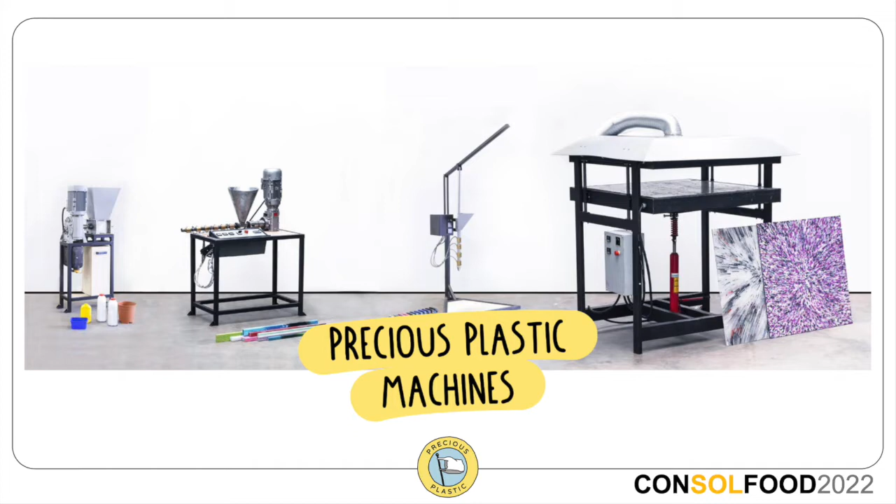For the past few years, we've been involved in projects developing solutions to tackle the plastic waste problem. At Precious Plastic, we help develop machines and online tools, open source, to make plastic recycling more accessible for everyone in the world. At Flipflopi, we've built the first sailing dhow from plastic waste collected along the beaches of Kenya, and are taking this boat on expeditions to spread awareness, connect, and inspire more people to change their perspectives and act towards a plastic-free environment.

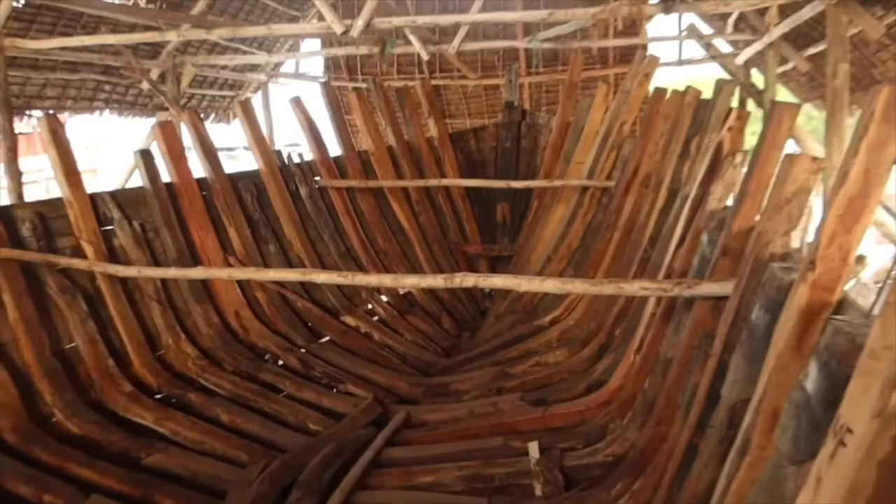We've already inspired a lot of change on an individual and political level. But now we are working on a big boat to bring it to the next level and take this positive symbol and change around the world. But with this big recycled plastic boat come new challenges we have to overcome.

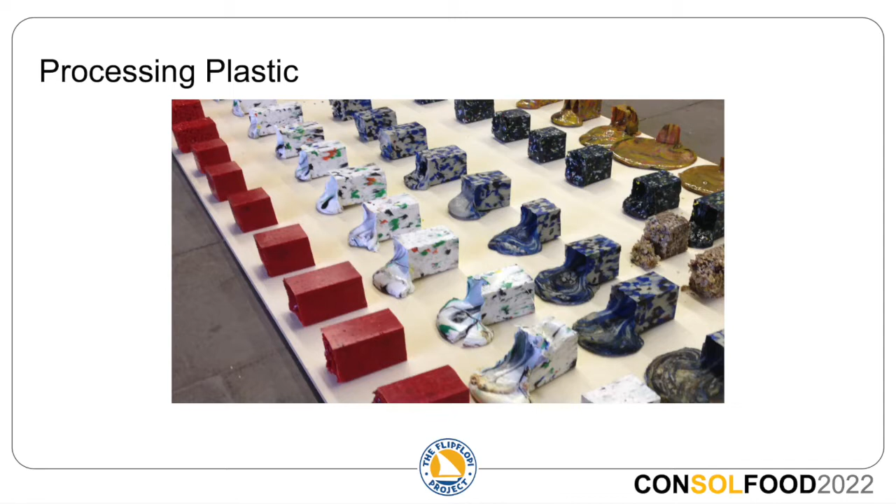So a quick note for general understanding: the principle of plastic recycling works like this. You can heat plastic up until it melts, and when it's soft, you can turn it into different shapes, basically any shape you want. And when it cools down again, it hardens. So basically just like chocolate.

In the case of this big recycled plastic boat, we are going to make big parts from recycled plastic. So we will need a lot of heat over a big surface and volume and over a bigger amount of time, because it takes longer to manufacture those parts. And that requires a lot of energy. As in Kenya, electricity is not as easy to get and maintain, while you do have a lot of sunlight, that brings us to our solar cooker.

And actually, we're not the first ones who had the idea of using solar cookers for plastic recycling. In our Precious Plastic recycling community, we've already seen some people building and using smaller solar units for smaller injection volumes and for plastic extrusion processes. So seeing that working in our community encouraged us to apply solar on our project too.

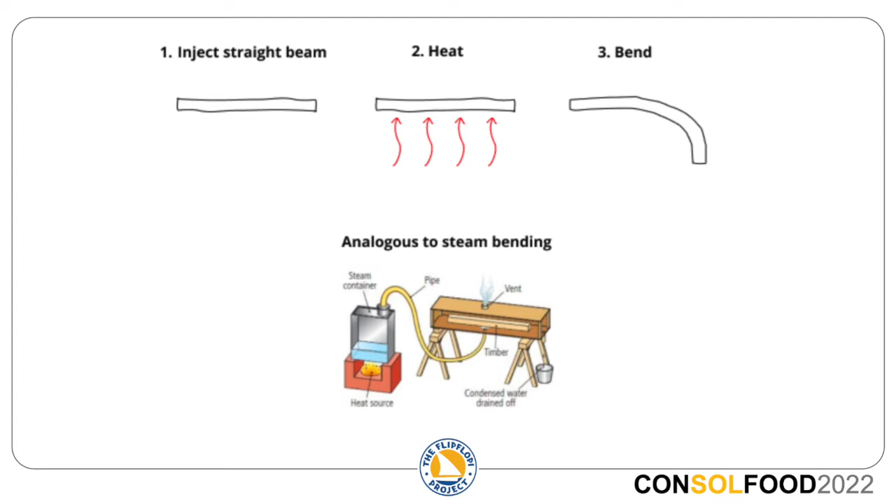First, looking into the different ways to heat our molds, we were looking for a method that could heat a large volume reliably and for a reasonable price. We were aiming for temperatures in the region of 160 to 240 degrees Celsius, so a solar cooker ended up being a serious contender. Looking into the different kinds of solar cookers, there was one format which was very suitable for making boat parts, which are essentially long beams, and that was a trough style collector.

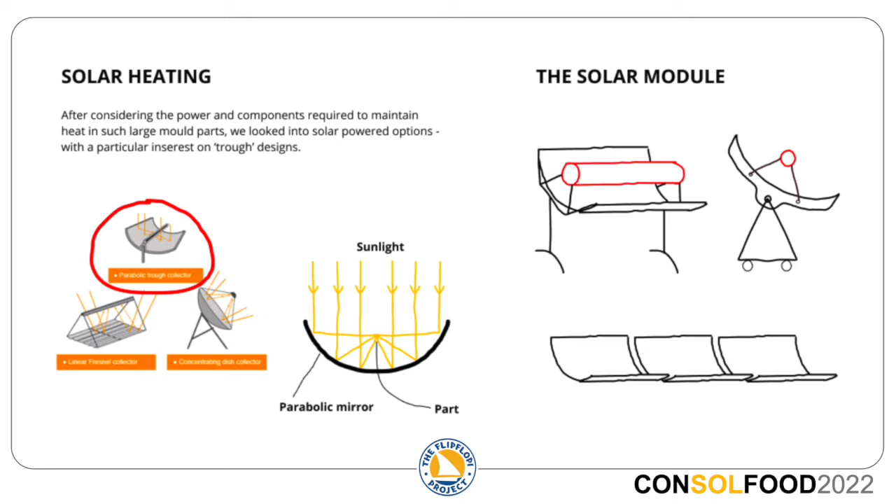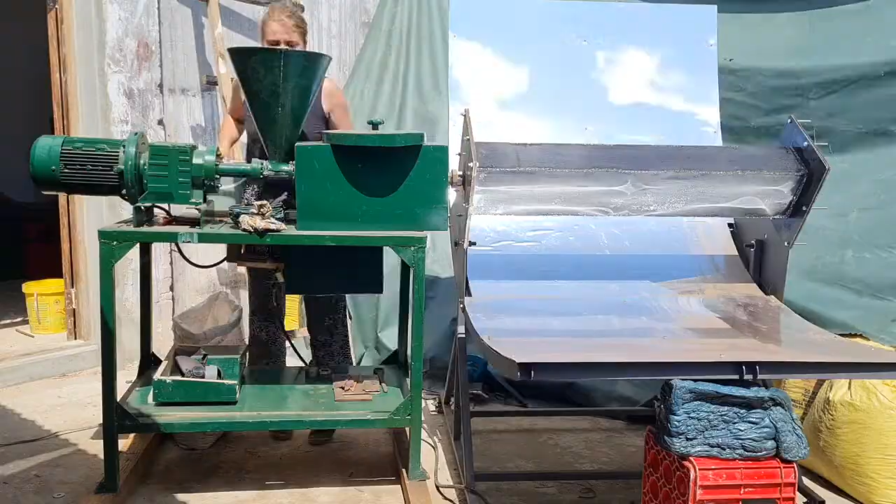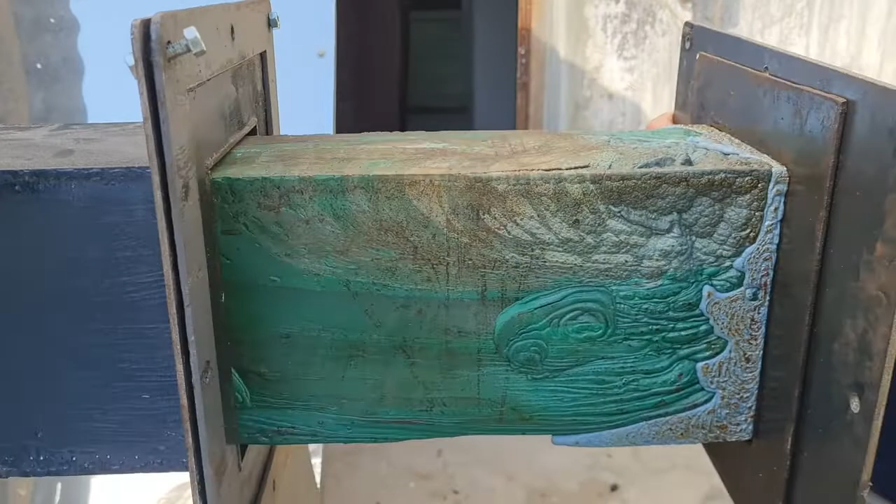The idea was to use one of these as an auxiliary device in order to keep our molds hot during the longer than usual injection period. Here's a picture of me doing that. You can see on the left me pouring plastic into the extrusion machine, hooked up to our mold that's being heated by the solar cooker. The whole process for this part took 7 hours to fill just the mold, and it worked really well. We would have never been able to make this part without additional heat. In fact, here are a couple of beams that didn't work because we made those on cloudier days.

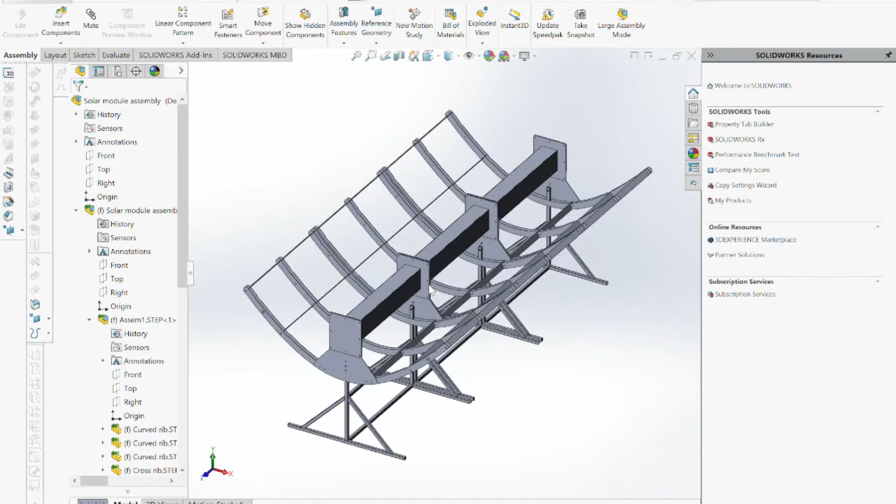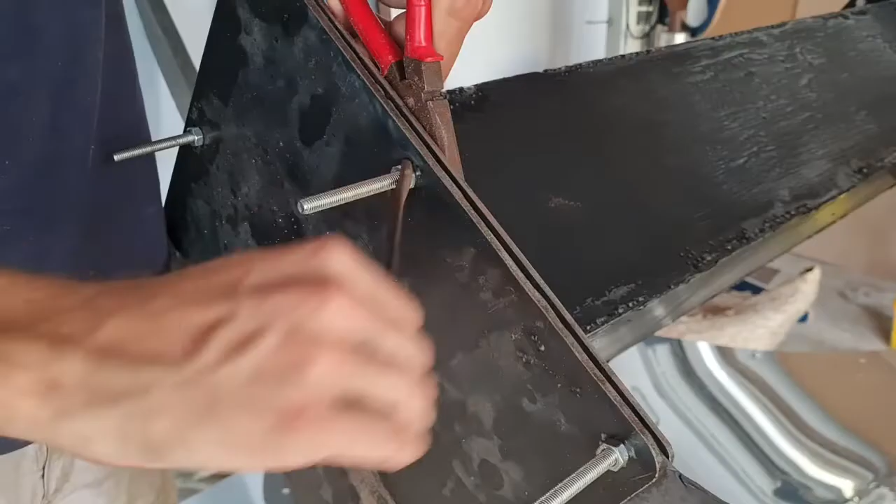One design feature that we built in was the ability to join many of our solar modules together into a chain, which can give us any length of oven that we want. The modules can be joined together with bolts, and the oven parts mate with each other to make a long continuous oven. You can also swap out the receiver, or in our case, the mold, for a different one. For us, this modularity was important for production of continuous plastic parts and different kinds of beams for the boat. But even for food, keeping it modular like this could be useful to enlarge existing ovens in the future or keep costs down for building very large ovens.

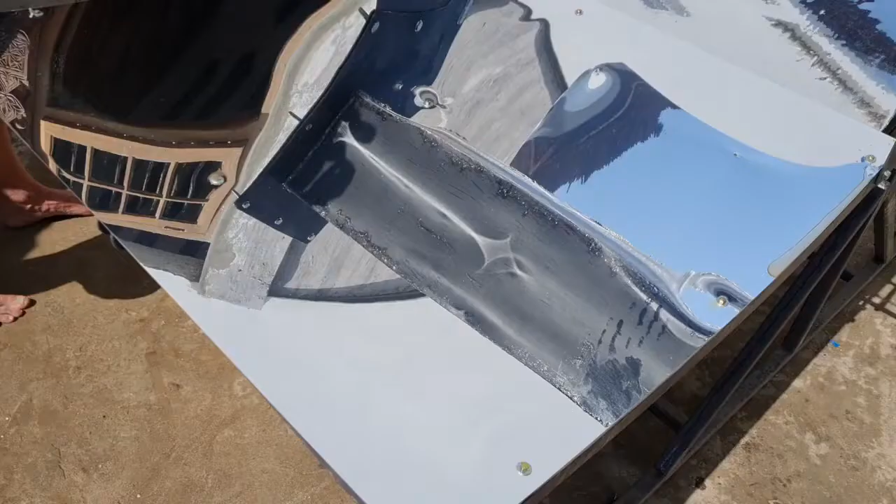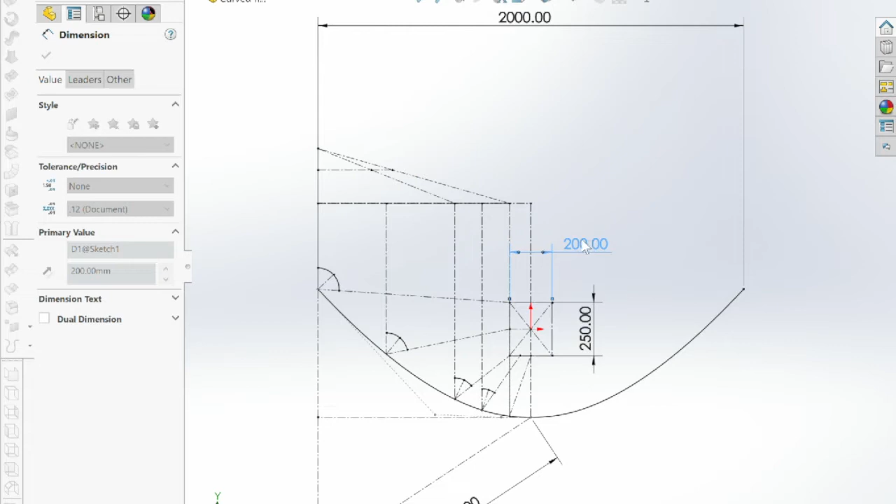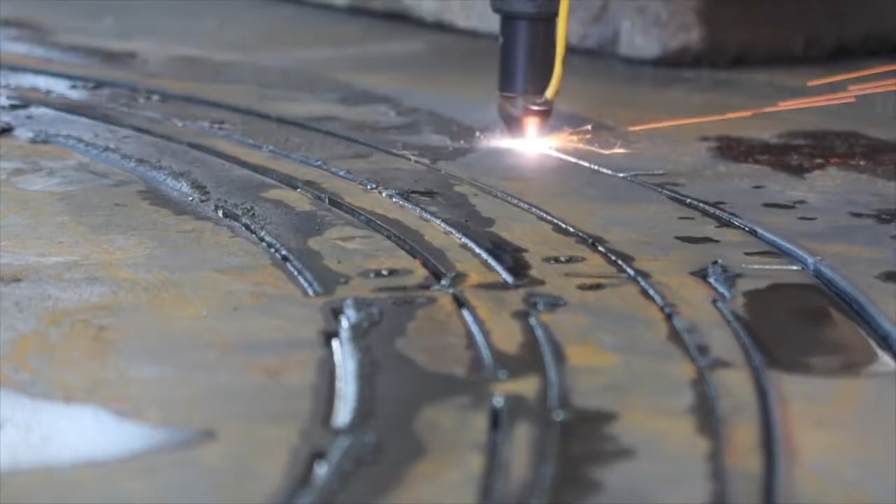Since our receiver's cross-section was a rectangle, we wanted to optimize the parabolic form to provide an even distribution of light to the receiver. So we modeled this geometrically and parametrically in our CAD software, which allowed us to change our input parameters, such as the receiver dimensions and the size of the reflective surface, and have our form automatically generated based on our requirements. This was a great way to quickly generate forms for different shapes and different parts, very quickly and reliably without too much maths. This sketch then dictates the geometry of our structure, which we then laser cut for maximum precision.

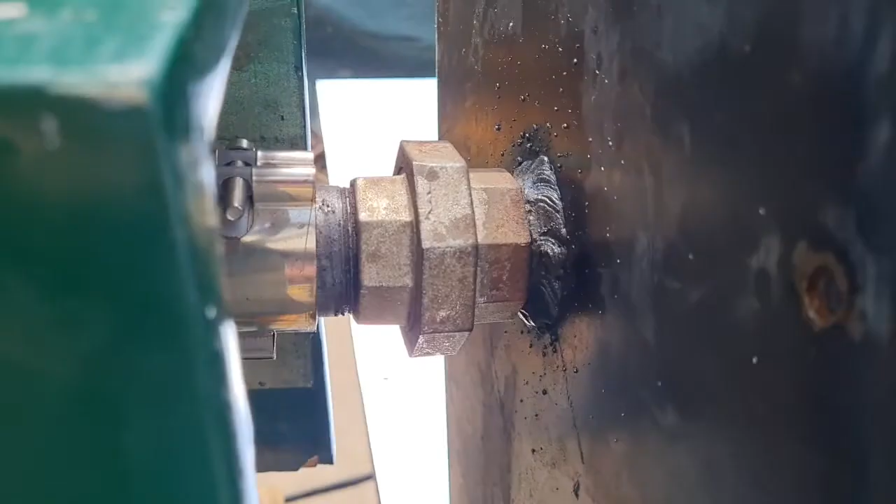One area of improvement for us was to have the point of rotation about the central axis of our receiver. This is because our receiver is connected to external machinery, so ideally this connection point should stay in the same place and not translate. The other thing was that for the size of the receiver, we were on the edge of being able to achieve suitable temperatures. So in the future, we would probably look into better insulation of our molds, or maybe a larger reflective surface.

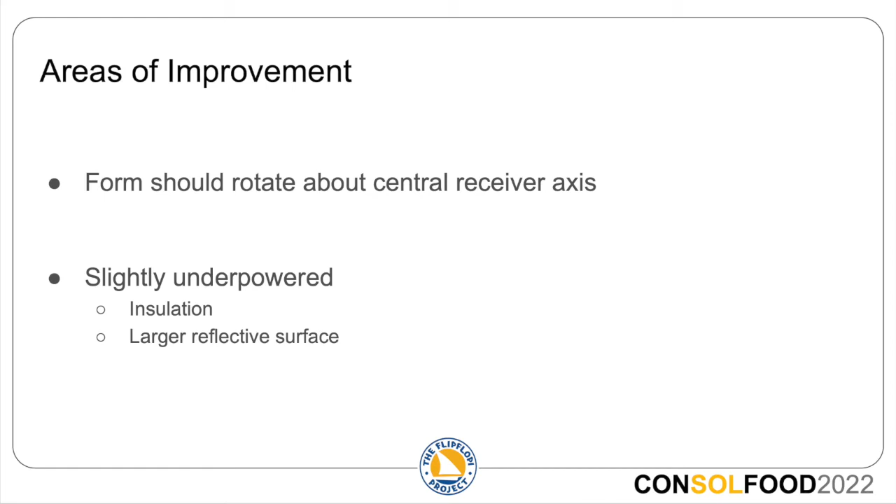For all the serious food processing fans, we haven't left you out completely. We cooked quite some food before we started on all the plastic, including this 1 meter chocolate cake using a local recipe from Lamu. I'll let Derek's reaction give you an idea of how it went.

This meets all the criteria that we have for a cake. It is hot, it is brown for chocolate, okay, and it touches every good part in the taste buds. So it's really good.

Thank you so much. Yeah, so as you can see, we definitely love solar cooking cakes and other good food, but we also think it's exciting and has a lot of potential to apply this technology on other areas where energy is needed. And we hope that this work can inspire more people to think further.